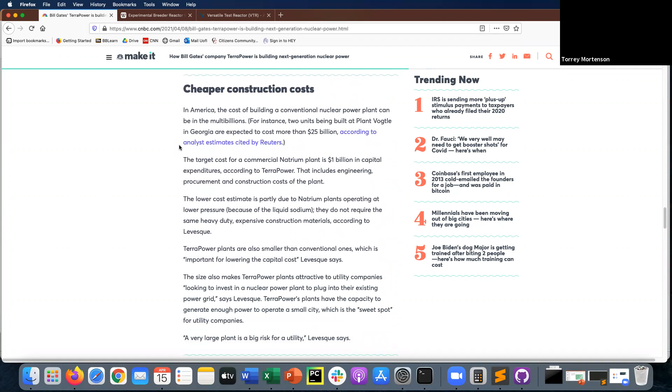Let me see here. All right, so yeah, I'm not sure about the waste thing. Cheaper construction costs. Okay, I'm just somewhat skeptical, but operating at lower pressure. Okay. They don't require the same heavy duty. Maybe, I don't know. Again, nuclear power plants, they're kind of like NASA experiments. They always are cheaper on paper.

Energy storage is an interesting thing. I had never heard of them storing it in straight up liquid, but that would make sense. There are some experiments here at the lab where they're exploring. There's one that uses essentially like ball bearings. I can't remember what they're made of, but the mix of metals in them stores heat really, really well. So something like that also is something they're looking at. So thermal batteries is an interesting thing. It's interesting though. They say everything that was old is new again.

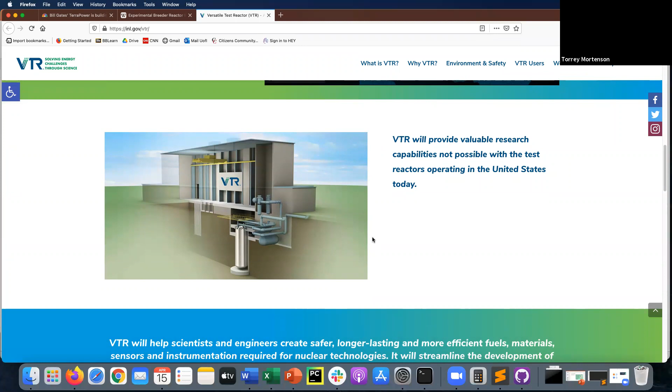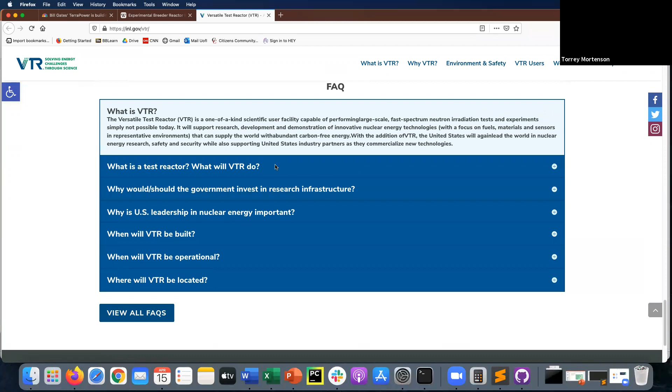And then the VTR, the Versatile Test Reactor, is an advanced test reactor that is supposed to be built here at INL over the next, I think, 5 to 10 years or so. It also is, I believe, sodium cooled. I think they decided that. I was involved in one at that time. I couldn't remember if they had determined it. Doesn't say. I think it is sodium cooled, but this is also a fast reactor for testing neutron flux and those kind of things. So, interesting. We'll see. I hope it works and it's profitable and everything.

The most important thing to me of this article and everything is where I think they reference it. Let me see here.

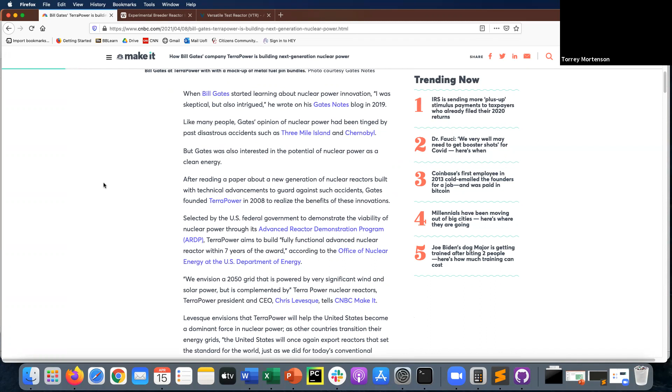It's in here somewhere, but they reference that nuclear power is the safest power generation method when compared with gigawatt generated. And it is. When there are instances, they're newsworthy, but in general, they are extremely safe. So that's an interesting one there.

And then, yeah, I covered this taser thing, so everybody can comment on that if you're interested. It is one of those things of looking at what happens when an error does occur, because it always will, given enough instances, right? We can just make it less likely. And Nathan captured how many different design choices and redundancies were taken with this situation.

And I commented here, I want you guys to consider when we make a mistake happening. Bad design's part of it. This is one of those times where you look at it and say, okay, they really did a good job with the design here. So how would you fix it? Nuclear training and procedures matter a lot. But cops train a lot with their service weapon and those things.

So it's an interesting thing to think about, though: when we do make an error or mistake, what all do we have to override to make that mistake? So like in this instance, what kind of sensory information had to be overridden: weight of the device, feel, visual system information, pulling from the wrong side of the body. There's a lot of that.

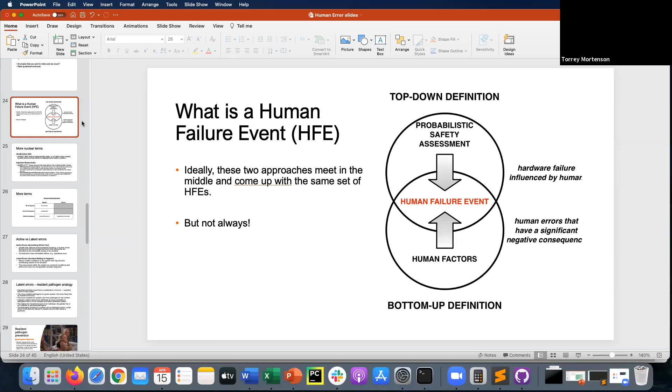Human failure events are called out, and they're typically human errors that will have a specific impact on equipment failure. So it's part of that: an equipment failure that would be precipitated or caused by a human error. These are more nuclear terms like the other ones. So unsafe actions are specifically defined and can be called out in different root cause analysis or event analysis things.

Important human actions. No pun intended, this is an important thing to remember. Important human actions, capital I, H, A, are actions that are called out in a probabilistic risk assessment or risk analysis where, if the human makes a mistake at that point or has an error, then the core damage frequency probability or release frequency is increased. It doesn't necessarily mean, oh, if the human messes up here, the core is definitely getting damaged. What it means is just the likelihood of that is increased.

So they're treated as a higher priority. You'll have task analysis determinations for those to really break them down, try to make them safer or design out any risk and mitigate those. So you have two different instances. Risk important is the one I just talked about there.

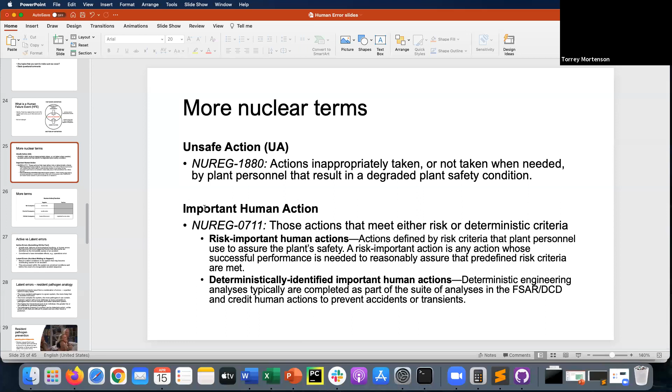And then deterministically identified are, when you're doing an FSAR, which is a safety analysis report, or design control document of your system, instances where there's no automation. The human has to take an action. So it's just kind of a process of elimination, right? Okay, the human action is important for this process, so therefore it becomes an important human action. And here, negative and positive human actions, and there are different consequences treated in nuclear.

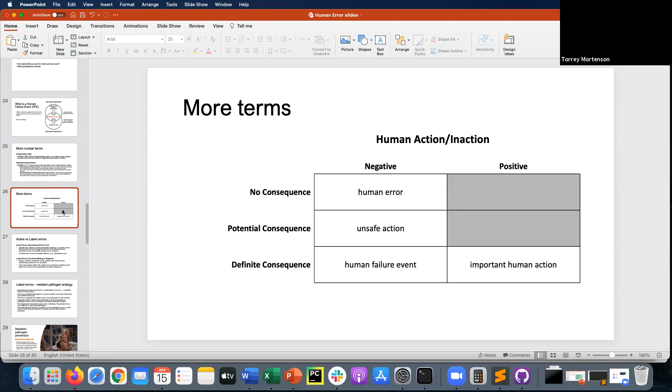This table sometimes makes it a little bit clearer because they seem to be saying the same thing over and over again. Active errors versus latent errors. So this is an important thing as we consider human error. An active error is an unsafe act or a failure of technological functions or human errors that become the local triggering events that afterwards are identified as immediate causes of an accident. So an operator error, or you meant to hit one button, you hit the wrong one, and therefore something bad happened.

Latent errors are more contributing causes, so they are the risks in the instance. The tiger got out of the pen at the zoo because the fence hadn't been replaced in 10 years. Like, that's a latent error. That's a risk that has not been mitigated.

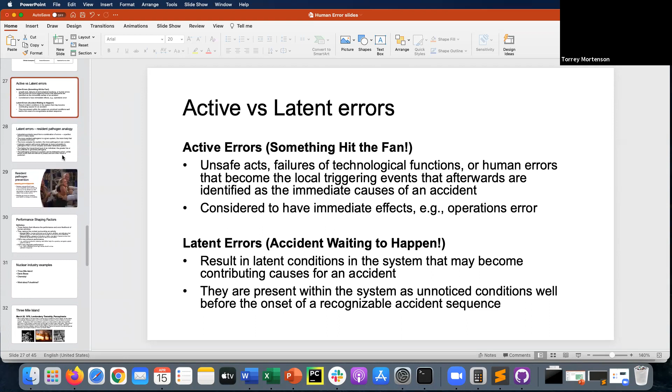Another way to think about latent errors, and this is my preference, is the resident pathogen analogy. So you can read through this, but specifically it's an analogy alongside healthcare. So the more resident pathogens that are in a given system, the more likely that an accident will occur. By definition, the more complex the system is, the more pathogens it can contain. Consider pathogens almost like vectors for error. So different ways that the error can come in.

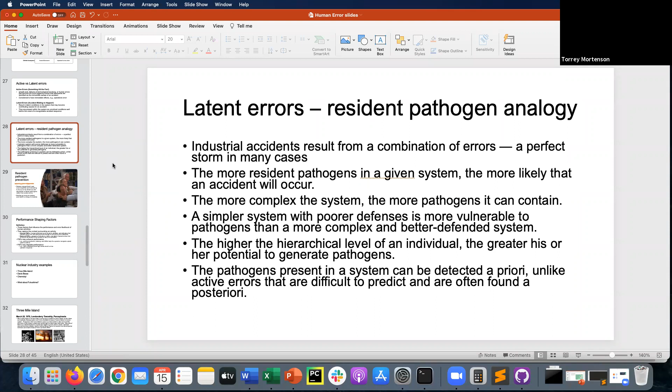If we think about the Swiss cheese model, these would be holes in the cheese, and how problematic they can be. And this all came from James Reason. He argued that it was more impactful to focus on the detection and elimination of these pathogens rather than active errors, specifically because active errors cannot be prevented 100%. But you can prevent latent errors.

Through robust design, testing, evaluation, maintenance, whatever, you can eliminate latent errors. With active errors, people will always make mistakes, but if you create a situation where the opportunity for those mistakes is decreased, then you're in a better place. So the analogy I drew is beefing up an immune system versus trying to live in the bubble completely. And obviously, picture from the Bubble Boy episode of Seinfeld.

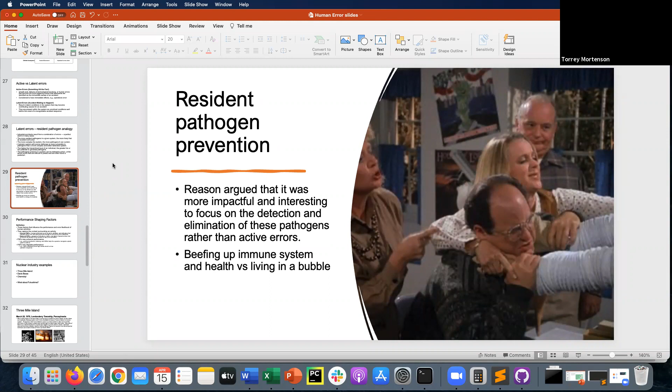Okay, performance shaping factors. This is a specific analysis term. When we talk about HRA, we're talking about modeling human error in specific instances and trying to get a probability of human error. Performance shaping factors are things that impact or modulate or otherwise affect the human error probability. So we have internal and external PSFs. The last time I saw a reputable count, there's probably over 60 different methods for HRA, and each of them has their own unique set of PSFs. I think SPAR-H is probably the lowest with 8 or 10, where there's some that have hundreds.

And realistically, there's probably an infinite number of PSFs. We're talking about things that can affect performance positively and negatively. So I always align it with: all PSFs are present at all times. Typical ones could be fatigue, stress, procedure quality, design quality, training, experience. There's a lot of different ones that could be there, and they're all really present.

So if you have no experience, that doesn't mean that the experience PSF just goes away. It means that it likely has a negative effect on your performance in a given situation. Vice versa, if you have a ton of experience, generally we would think that it would enhance your performance. However, tunneling, we've always done it this way, those kind of things can also be problematic. So it's context dependent, difficult. The physiological PSFs are a little bit simpler, right?

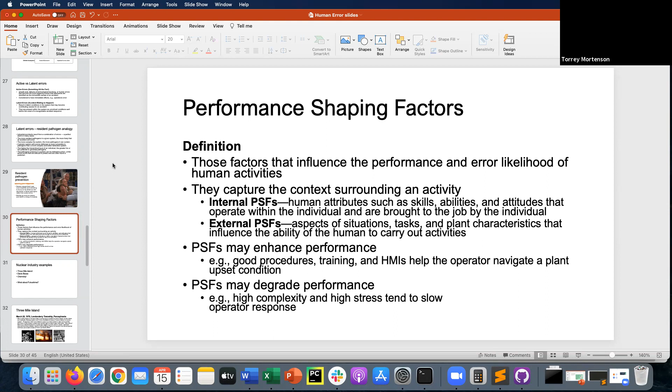When cognitively, those are very different. Those would have very different impacts and very different failure points. Vigilance is a problem for specific cognitive reasons. Complexity is a problem for specific cognitive reasons, and they're not the same. So that's another part of this that you have to consider.

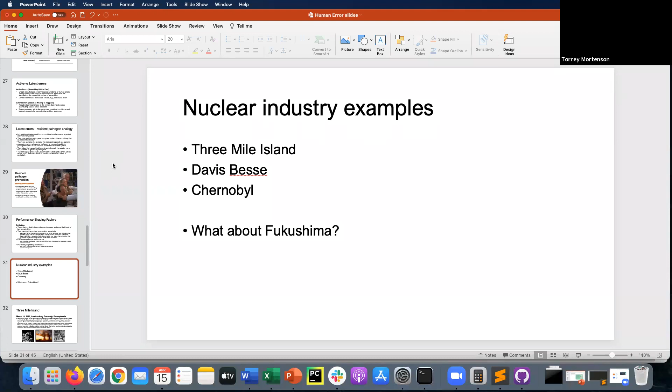I'm going to go into 4 different instances of nuclear errors. One thing you'll find, whether it's nuclear errors or aviation or whatever, you will always find someone's blaming a human. When there's loss of life or property, we want somebody to blame. Blaming an algorithm or a piece of metal isn't usually very satisfying. Doesn't play well in the media. So there's always something there. Fukushima is a little bit of a different case, though, so we'll see that as we go through.

You're probably familiar with these: Three Mile Island, Chernobyl. Davis-Besse might not be. It's pretty famous in the nuclear world, but TMI and Chernobyl are the big ones you'll hear about outside of that. So at Three Mile Island, there was a malfunction in the cooling circuit of the Unit 2 reactor. The backup system was not initially available because of human failure to restore the system.

A PORV failed to close, but the instrumentation didn't reveal this, so much of the primary coolant was lost through the relief valve. Because of that, and because of the failure to understand the physics of what was happening in the reactor vessel, operators secured inventory makeup, and the residual decay heat in the reactor core caused a partial meltdown and a small release of fission products off-site. There have been no cases of radiation poisoning from Three Mile Island or any attributable issues from that.

The important thing to look at here is some specific things. Human contributions to TMI: poor human factors. The valve indicator lights for the PORV did not show the true position of the valve. That's an instrumentation failure. Limited training. The operators didn't have as much awareness of the big picture of the plant to know what was going on in this situation. And there was too much emphasis placed on avoiding a solid pressurizer.

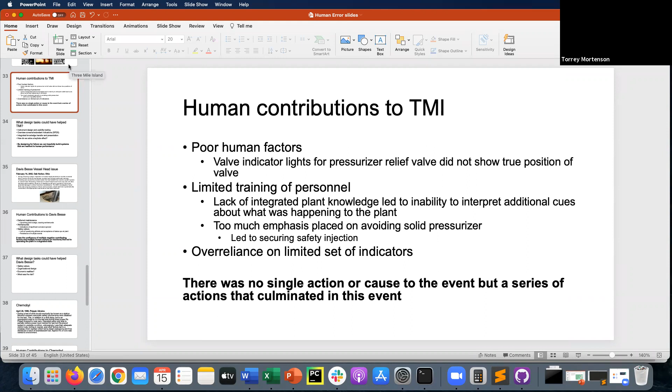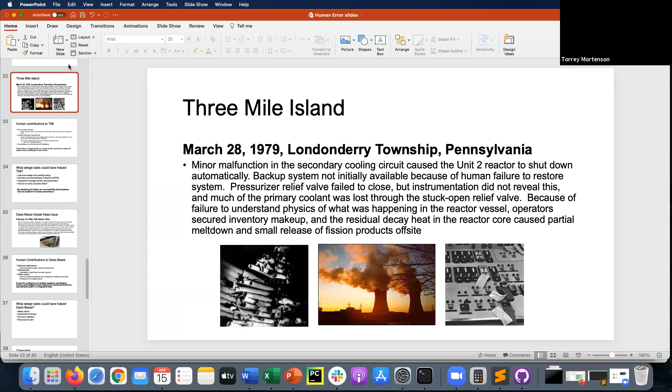What design tasks could have helped? Instrument design and usability testing and validation, some of these things that were, let's be honest, hard to do back in 1979, or you didn't even know you had to do them. Overview screens, redundant indicators, SPDS. These actually came from TMI. These were recommendations called safety parameter display systems. They are essentially overview screens or a series of redundant indications. Some work on integrated knowledge transfer and presentation of that knowledge.

But how do you solve a keyhole effect? How do you solve tunneling on something you're really focused on? People are really good at focusing on specific things. We're not as good at looking at the big picture. So a big thing to think about here is designing for failure. If you can design for the instance of failure: okay, failure occurred, you are now in a partial meltdown. What do these operators need to know? What do they need to be able to do? Those are some of the things that are important to help build up the resilience of the human.

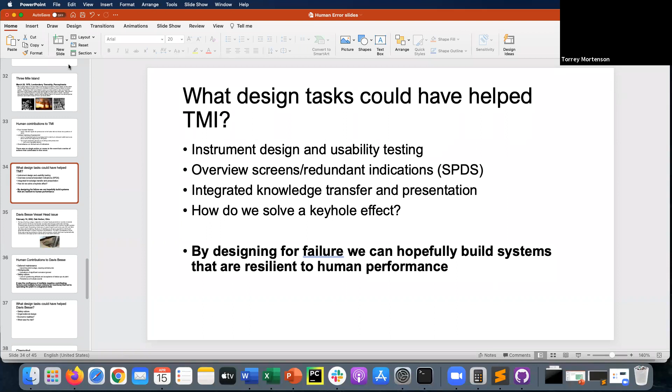The Davis-Besse vessel head issue. This was in 2002. There was a notice that you had through-wall axial cracking. The cracking was caused by borated water. Boron is a neutron absorber, so borated water is commonly used as a neutron absorber as part of a safety system. But it's also corrosive. The remaining thickness of the vessel head was found to be only 3/8 of an inch of stainless steel. That is pretty crazy.

Rupture of cladding would have resulted in a LOCA, which is a loss of coolant accident, like what you saw with Three Mile Island. The reason you get meltdowns is because you can't cool the reactor. So that would be really bad, and damage to the control rod drive mechanism. If your control rods can't insert, you have no way of stopping the nuclear chain reaction.

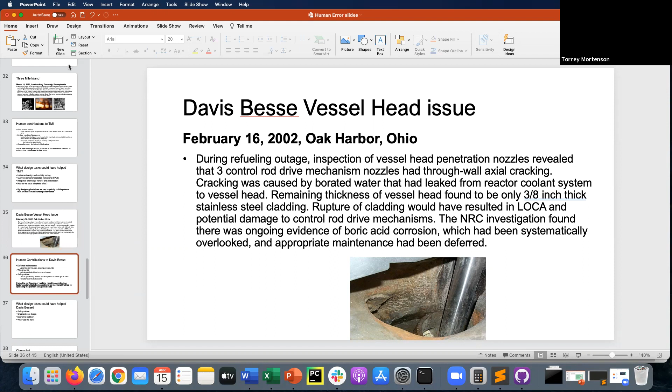There was ongoing evidence of boric acid corrosion, which had systematically been overlooked, and appropriate maintenance had been deferred. So deferred maintenance. There was an upcoming plant outage, so they were trying to just make it work till then. It's very expensive to shut down a nuclear reactor to do that kind of maintenance.

That led to these workarounds. Safety culture problem: it was found there was a lack of questioning attitude and acceptance of the status quo at plants, and persistence of multiple events and no change. That's part of why now, when something goes wrong, you can raise those issues and they need to be treated seriously. But this was a confluence of multiple negative contributing factors and human actions that led to operating the plant in a degraded state.

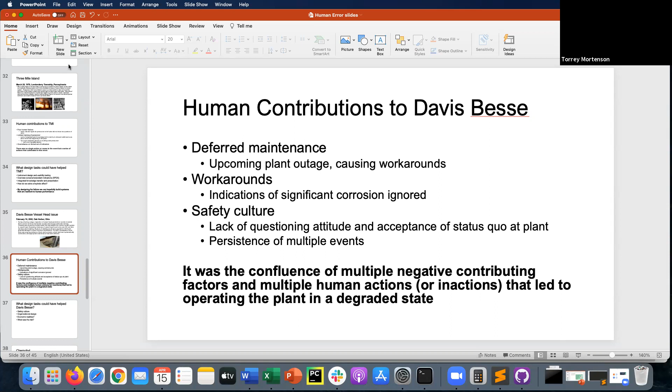This is also a big case of organizational failure and some of that management system failure, versus TMI, which had more instrument control problems. So obviously safety culture came out of the Davis-Besse stuff. Just culture, which was a thing presented, I think, by Sidney Dekker.

Now, those first two we can solve with design. We can work on organizational resilience. We can work on safety culture and those things. We can incentivize those. We can punish them if they don't exist. But those last two, how do you design away the economic realities that shutting down a nuclear reactor costs millions of dollars a day, not to mention grid impacts and those kind of things, and the cost of repairing a vessel head?

Building a reactor site is also incredibly expensive. The reactor vessel head isn't something you can just ship off to somebody to repair. You're going to have to expose the core in some way in order to repair that. That's a huge undertaking. So that's one of those realities we need to consider. How do we stop those kind of economic pressures? And then what was the risk?

This is the biggest one I always think about: as people, we're really bad at forecasting events. We're really bad at predicting and projecting our current state into the future. So perception of risk is something we're very bad at. So how do we show that? In 2002, computation is pretty strong, but it's not where it is now. So this is where we get into machine learning or AI-backed decision support engines.

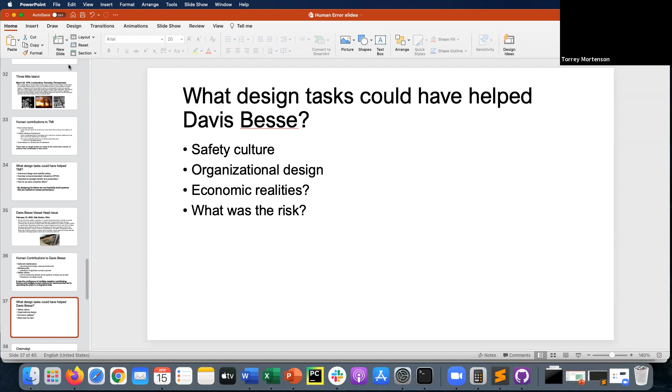Chernobyl. So this happened after TMI. Some people, I know me, I always thought it happened before. So this is a unique one. It's non-US. This is running in a completely different reactor technology, and was an odd series of events. So this was during a test of what would eventually be known as the station blackout.

So a unique thing, nuclear reactors generally don't power themselves. They're connected to the grid and drawing power from the grid. So you can have what's called a station blackout, which is when the nuclear facility loses power and the control room goes dark. There are specific procedures designed to govern what you do in that instance.

So automatic safety mechanisms were disabled for the test. This, in addition to a shift delay of, I think it was 10 hours or so, led a separate crew that had never been briefed on it to run the test. And during powering down of the reactor, the power dropped precipitously to near zero. They were only able to partially restore the power level needed for the test, but that placed the system in an unstable condition, which is something they did not know because of a flaw in the reactor design. To restore power, by the way, they had to remove control rods, and that put it in an unsafe condition as well.

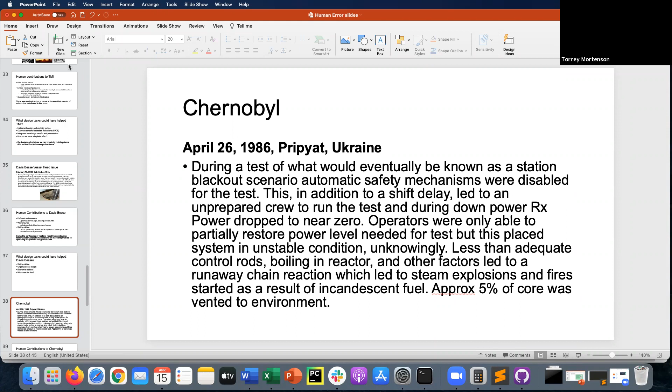That's right here. Less than adequate control rods led to boiling of coolant in the reactor, and other factors led to a runaway chain reaction. Because the control rods were too far out, they couldn't stop the reaction, which led to steam explosions, and fires started as a result of incandescent fuel. So the fuel was hot enough, it was glowing. Approximately 5% of the core was vented to the environment.

So human contributions to Chernobyl: absent safety culture, that just wasn't a thing, which led to organizational culture problems. There was a poor understanding of its reactor design and technical specifications and its own resilience, and the disabling of automatic safety systems with no redundancy or mitigations in place if the test were to go poorly.

If you are interested in that, there's the newer documentary, but there's a lot of good information out there. Chernobyl, last I'd heard, you can go there and tour now. I don't think anything can grow there yet. Chernobyl was the only instance of radioactive death immediately that I can recall. Some of the fire department members that were first on site died nearly immediately from radiation. It's still there. They essentially built a shroud around it as the radiation continues to decay to half-life and those kind of things.

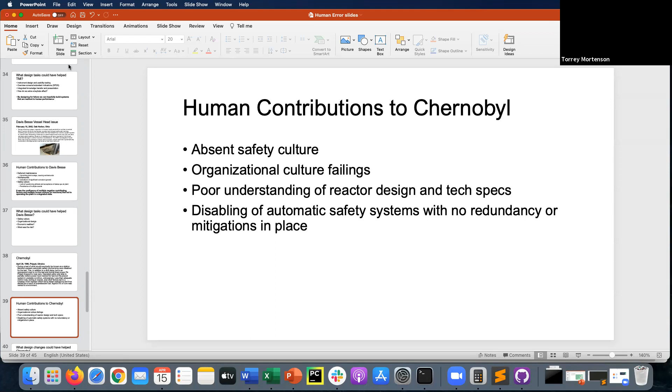So what design changes could have helped Chernobyl? Safety culture. So decision support, contextual awareness of what was going on, technical competency, testing for failure. I would also add in here just understanding the human, right? Putting someone in a situation that they've never been in before and then expecting success. It was just a very problematic incident.

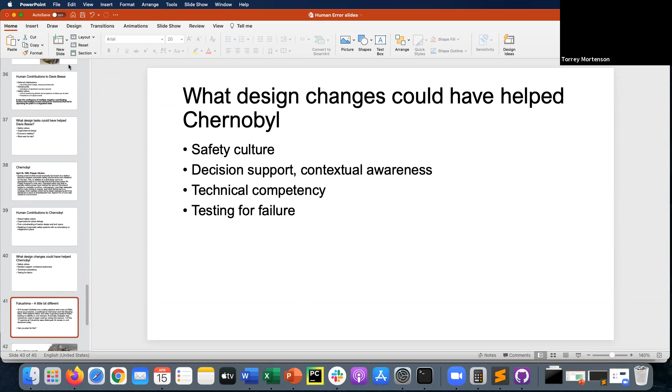So, can you plan for this? This is one of the things I brought up. It wasn't the earthquake, which was, I think, a 9.3 or something, that hurt the reactors. They were actually extremely resilient seismically. And there was a tsunami wall. They just weren't expecting a 40-foot tsunami, which essentially drowned some of these systems with seawater. So how do you plan for what would traditionally be called acts of God? How do you plan for these situations that wouldn't ever occur in most cases?

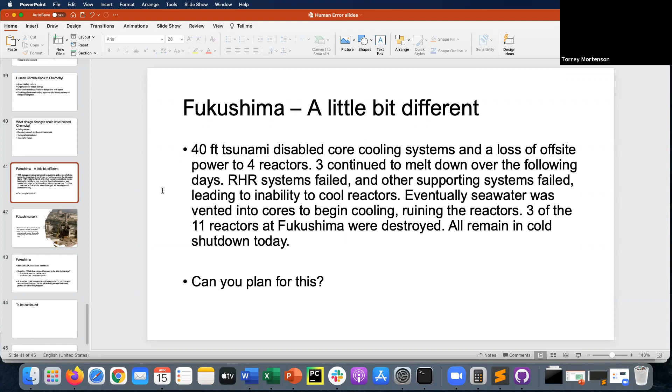So what happened? Birthed flex procedures worldwide. So the staff was very creative by hunting down batteries, pumps, generators, and anything else that could be of use. So they lost all residual heat removal and they lost AC power. So the reactor wasn't powered, which meant all of those pumps and things that are intended to help in these instances were not functional because they had no power.

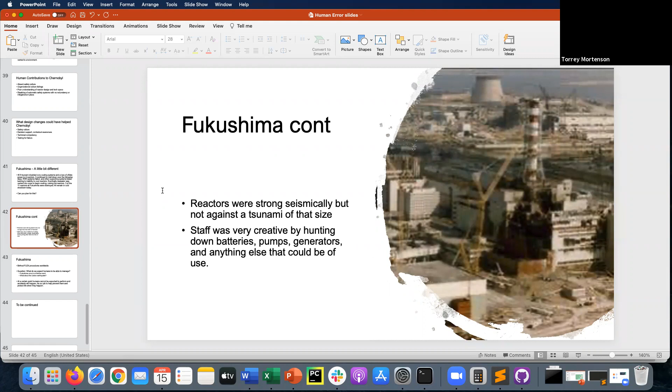So they were clever and they went out in the parking lot. There was a bunch of cars there, and a lot of them started breaking open these cars and getting the batteries out and wiring them up to power different things. Some of them were able to find pumps, generators of different sizes; they were trying to pump water out of these facilities so that they could get at the generators and all those. That's what birthed what we call flex procedures. Flex is flexible plant operations.

So as a result of Fukushima, there's a lot of different types of steps and mitigations in place, but some of them are, for example, I believe in the United States, no nuclear facility is in a position where if there was such an incident, generators, additional pumps, those kind of things cannot be delivered outside of 24 hours. Like I think we have deployment stockpiles in most major areas, so that's an instance there.

We also have nuclear facilities now building outbuildings, different additional facilities to store pumps, generators, and these kind of things for such an instance. But the question I want you guys to think about is, what do we expect humans to be able to manage? So Fukushima is like a once in a lifetime event, just like the Lisbon earthquake.

At what point do we keep putting this on humans, right? It's a once in a lifetime event. If you do everything right, you're going to be a hero. If not, we're going to haul you in front of Congress and you're going to have to explain why your actions are a root cause to something failing. We need to kind of consider that.